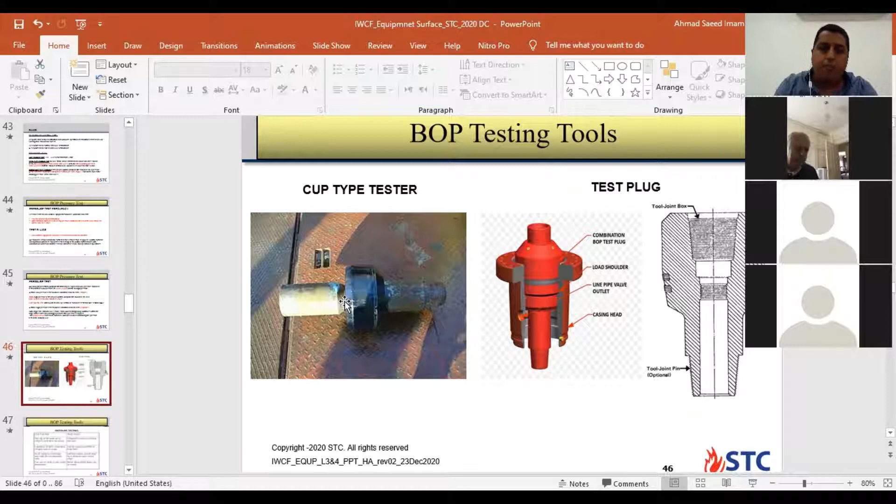There is a BOP manufacturer test, or shell or body test, performed once in the factory after manufacture, and then recertification for the BOP. When can we do recertification or force certification for the BOP stack? Every how many years?

Every how many years do we need to recertify? Every 5 years. Every 5 years, this is the maximum, to make full redressing or full check for the BOP. You need to replace it with another certified one, and send this one to the workshop at the OEM or manufacturer for checking.

Yes, Mr. Saleh: 5 years from the first test or from the first time we start using it? From the time of certification. Okay, it's not from the first test, it's from the certification from the manufacturer.

For any BOP less than 10K, when we pressure test that one in the workshop the first time, it will use or pressure test up to 200%, or twice its rated working pressure. For example, if the certificate is 5K for your BOP stack, that means we take a safety factor, because we pressure test it to 10,000 PSI, two times.

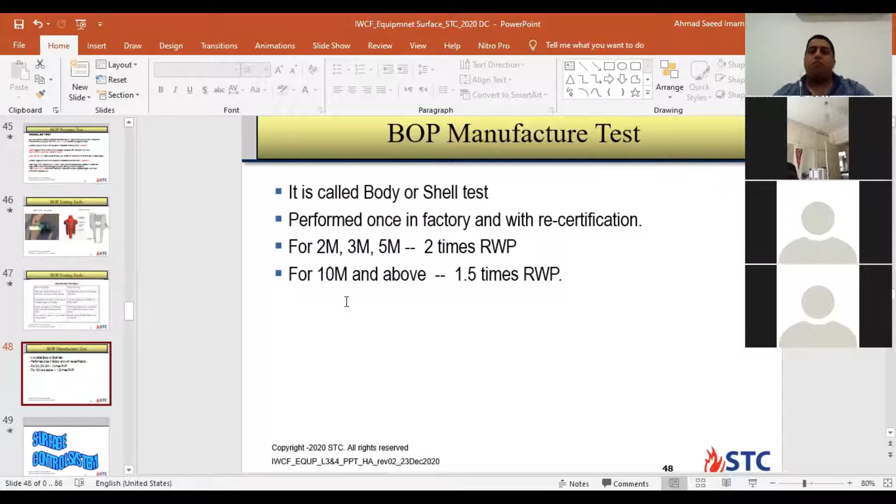Okay, now we're going to start talking about the surface control system for the BOP. Here mainly we'll talk about the surface BOP stack surface control system, which is simple compared with the subsurface system or subsea system.

The main component for the direct surface well control system is a reservoir tank, containing storage for hydraulic oil. What is the minimum requirement for the tank volume for the reservoir tank according to API? How many gallons do we need to fill this tank, or reservoir tank?

So the volume that makes you close, open, and close again for each run? No. The requirement is twice the usable fluid to close all the BOP functions. You are talking about the reservoir capacity, right? Yeah, reservoir capacity, it is twice the volume. If total volume, for example, is 150 to close, you will fill this one with 300 gallons. Okay, this is the requirement for safety.

And you have a pumping system. The pumping system has two independent sources: electrical, the main one, pump, and pneumatic or air supply pump. The same will be at surface, also at the subsea application.

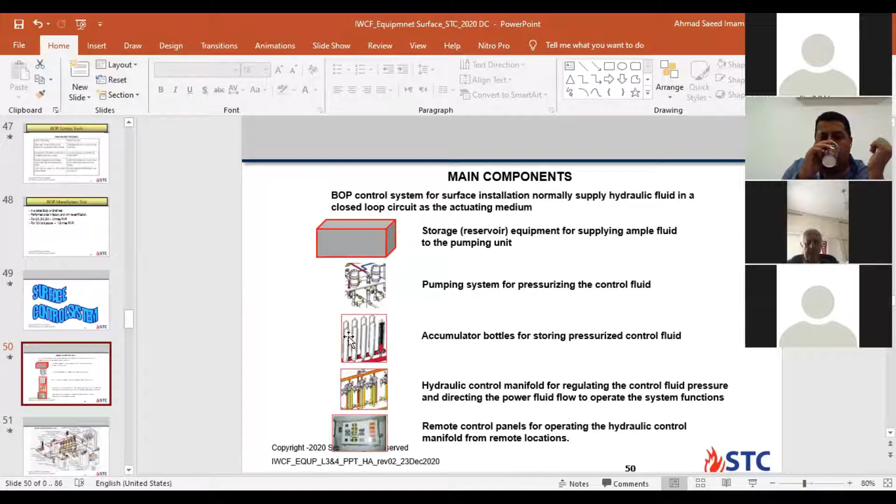I think in subsea it's electrical, not air operated, right? Yeah, it is an electrical system.

Here, this is the basic surface system. This is the bypass valve to operate, so it bypasses the manifold regulator and gives 3000 PSI on the manifold pressure. This is the regulator for the annular. This is the electrical pump, this is the pneumatic pump, the air pump, and these are the bottles. It is simple compared to subsea.

For charging, yeah Mr. Saleh? No, nothing, I forgot to lower my hand. Okay, no problem.

Okay, this pumping system, electrical and pneumatic or air supply, both work together to charge the system. But we have setting sensors for low and high for each pump. According to the API, the hydraulic electrical pump will start to run if you drop 10% from the pressure for the accumulator bottle.

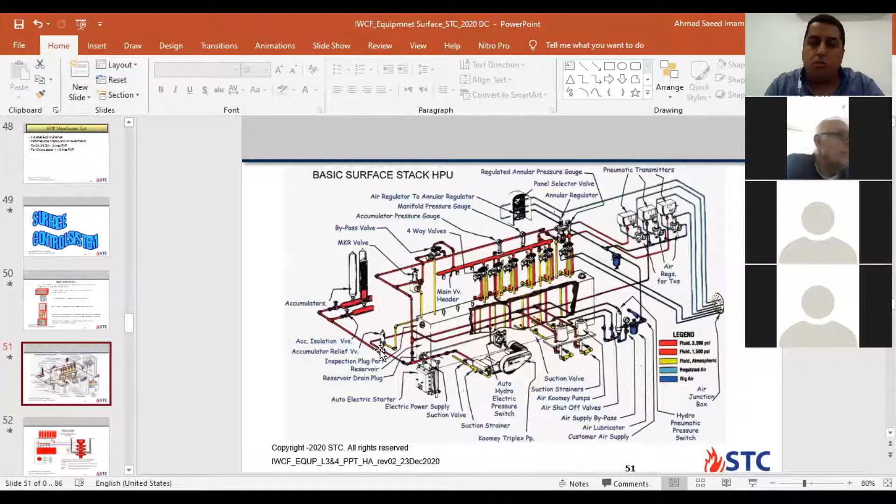Okay, correct, all right.

So why do I put storage hydraulic oil under pressure in the bottle? Why do I need it? The system is working with two pumps. If the hydraulic pressure I took to make one function to the BOP is coming less, the charging pump will start charging the system again to 3,000 psi. This is the concept while operating.

Why do I need to have 3,000 psi under pressure? If we lose power, we may use the trapped pressure inside. First, to make the closing time for the BOP fast, you take the under-pressure volume to close. Second, if you have a power failure, like a fire on the rig, you need to shut down all the power system. In this case, I can depend on the 3,000 psi in the accumulator bottle.

And also, this is something I can do intentionally, which is called the accumulator or drawdown test. I can switch by myself or isolate the pumping system to see the performance of the accumulator bottle, to see which function I can perform. What is the function if you isolate the pumping system and use the pressure from the bottle? What is the function I can do for the BOP stack according to the API?

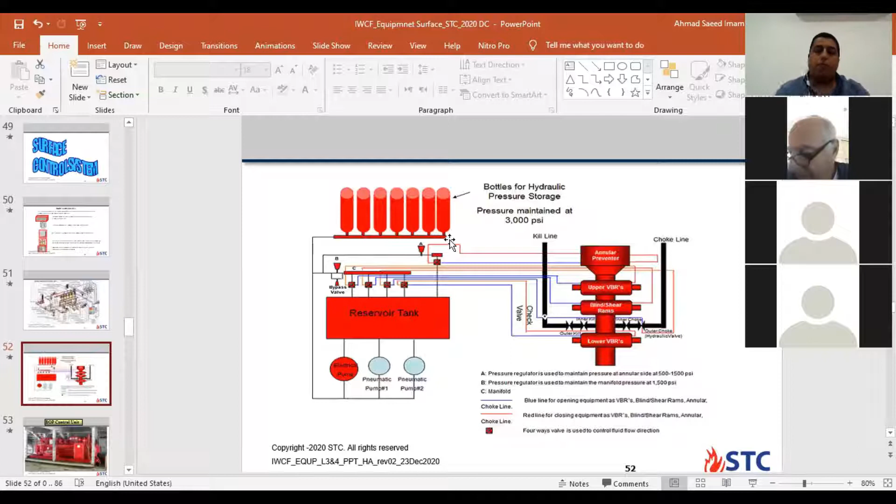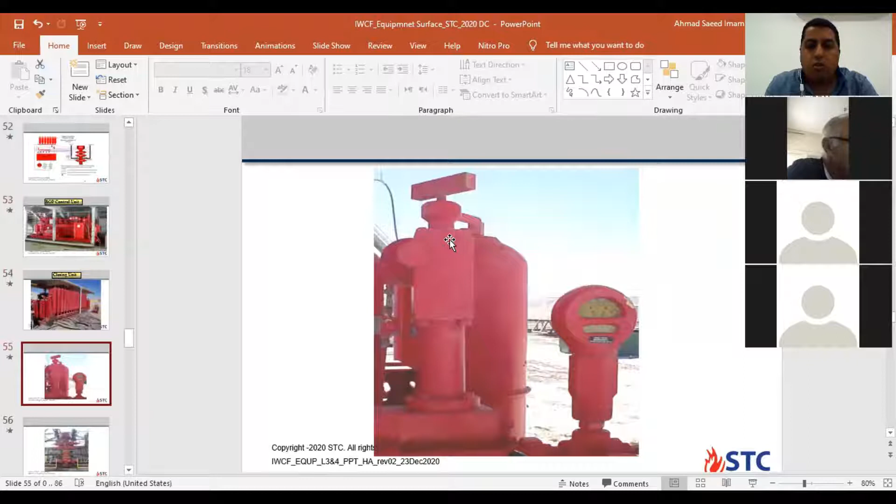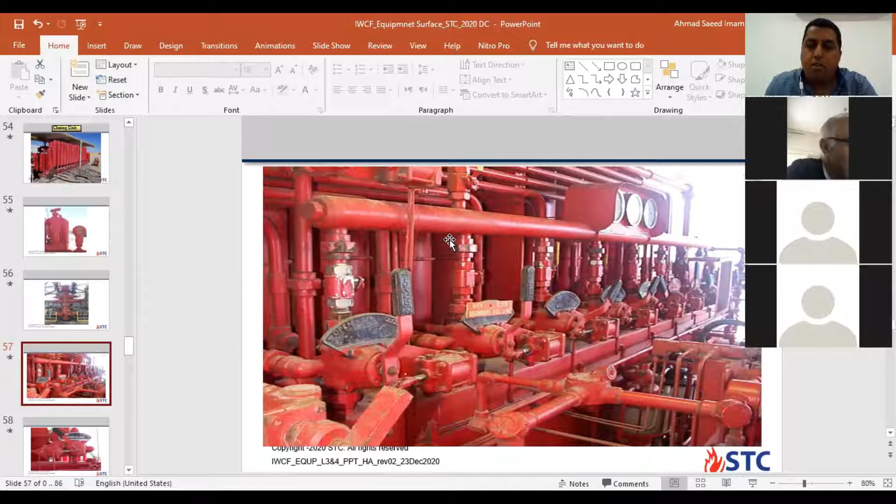This is a BOP control unit for a surface BOP. This is a bottle. This is the annular regulator by hand, manual one. This is the BOP. This is the 3-position 4-way valve. It is operated on surface, differing from subsea. This is open and close, and the position is neutral or block position in the middle. It is recommended according to API not to put this one in the middle. If it is in operation, you need to put it in open or close.

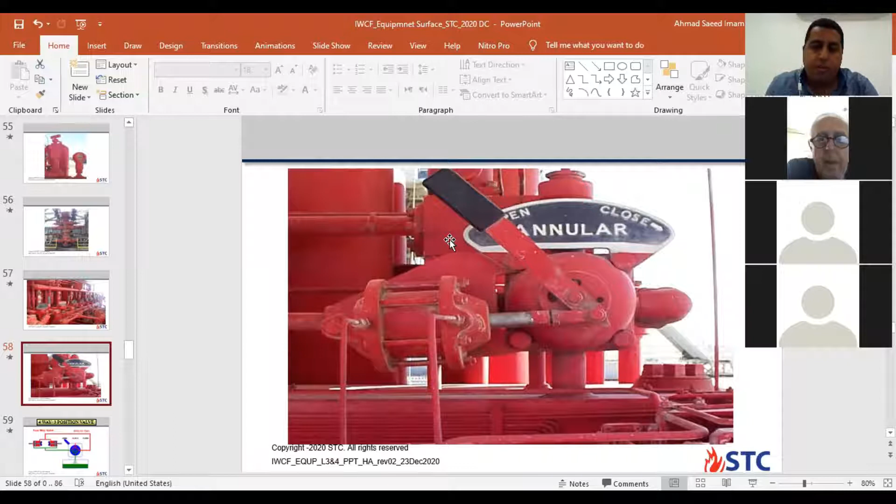This is the 4-way 3-position valve. Actually, for a surface BOP stack, it usually uses the selector type, called a selector type valve. Why is it called 4-way? Because it has 4 connections. One connection to the reservoir tank below, one connection to the gauge at 3,000 psi, another connection to open the ram, and another connection number 4 to close the ram. That's why it is 4-way, 3-position: open, block or neutral, and close position.

When I push to open, that means the pressure at 1,500 starts filling the opening chamber, pushing the ram away from the tubing or pipe. Then the hydraulic oil in the closing chamber will be drained back to the reservoir tank. This is for surface BOP application. But in subsea, it will be a little different because you cannot receive this volume back to the reservoir tank as on the surface.

In block position, if you put it in block position, you will block any leak inside the line, so it will be blind, neutral position. That's why it's not recommended to install in block position while in use. You need to use open or close position.

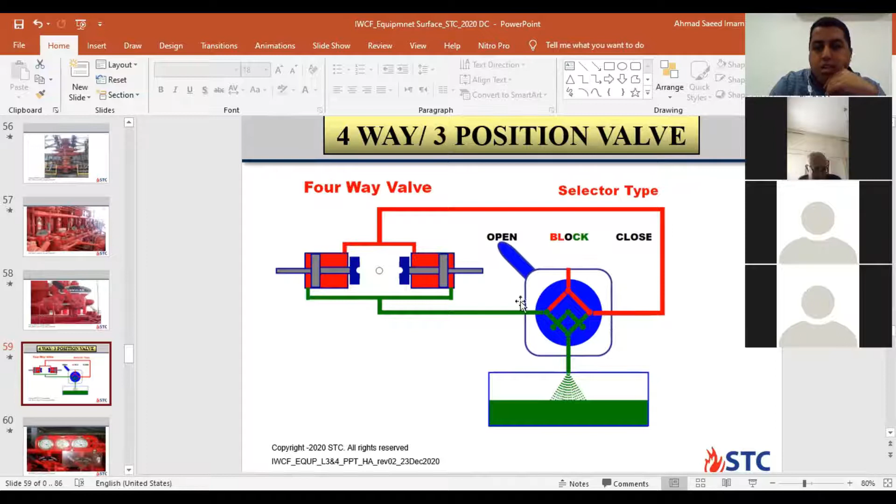And sometimes this selector valve may be leaking fluid, so when you put it in block position, you will stop this leak. You will not see it. Correct. Okay, yes.

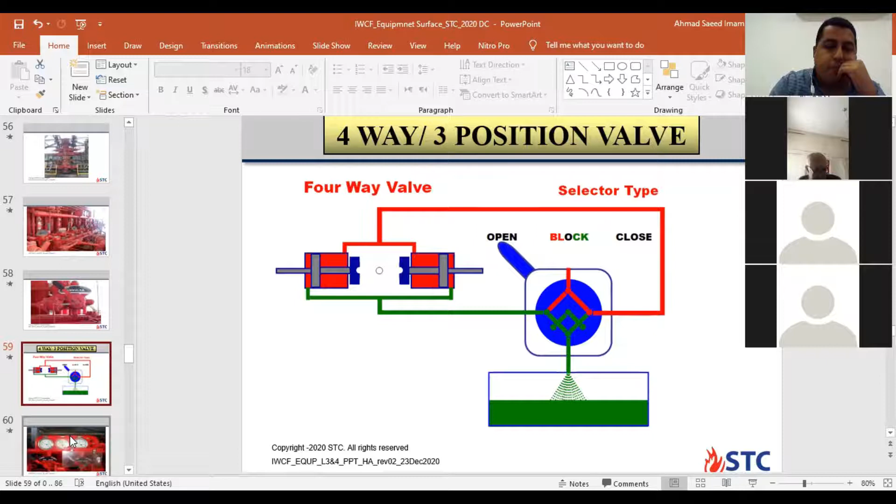Since it is shear on 3,000 psi, there is no problem. But if you operate the shear at 1,500, it can collapse - cut or collapse your pipe. In some condition, it can cut some tubular.

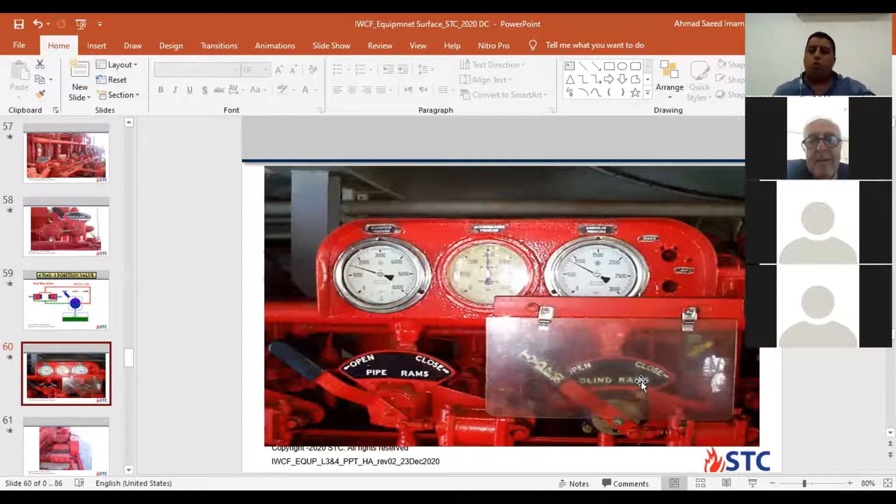Like in Saudi Aramco, they put this cover, and at the end for the cover there is a screw connected to an electrical sensor. When you start to move that one, it sounds and gives you an alarm - take care, you are going to shear. Yeah, this is for safety.

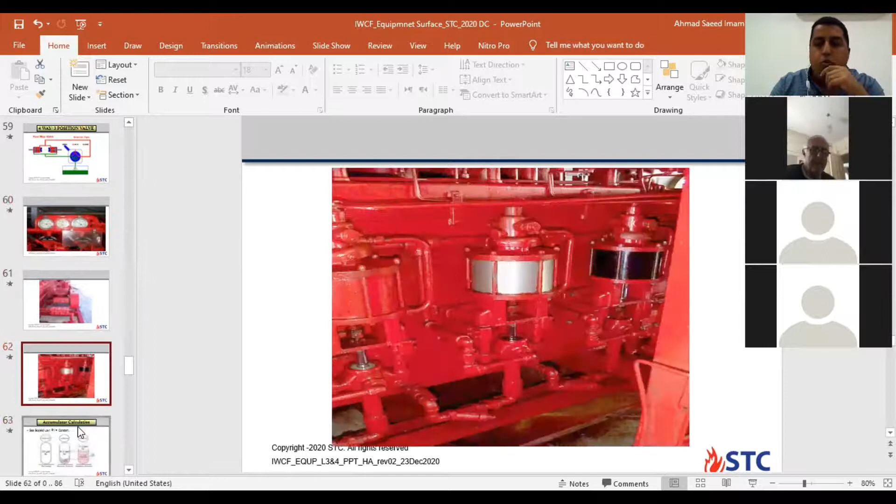Mr. Hani, is this for any operation? This is for surface bottle, not for subsea. Yeah, but for any operation? For any operation, if you have it, you can apply this pressure law, P1V1 equal P2V2, to get the pressure for the gas or volume for the gas, and the rest will be for the oil. Okay.

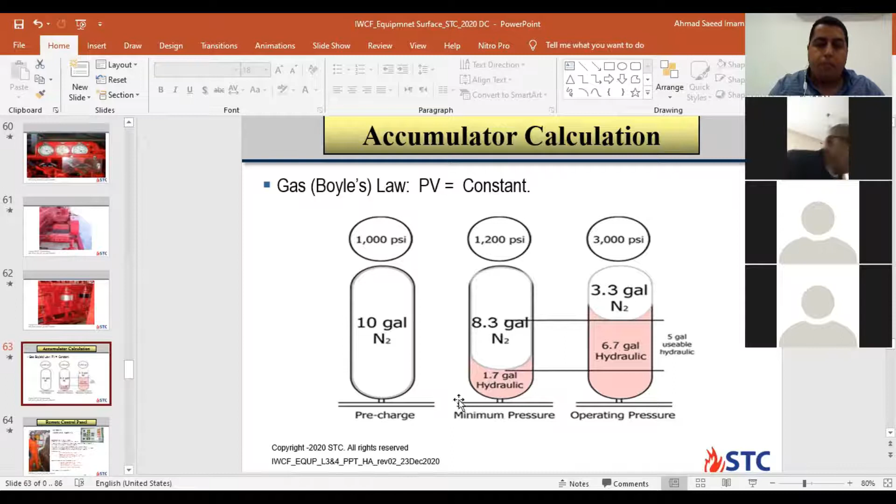What is the optimum pressure for the air pressure in the rig? 100 to 120. Sorry? 100 to 120. No, actually it is 120 to 125.

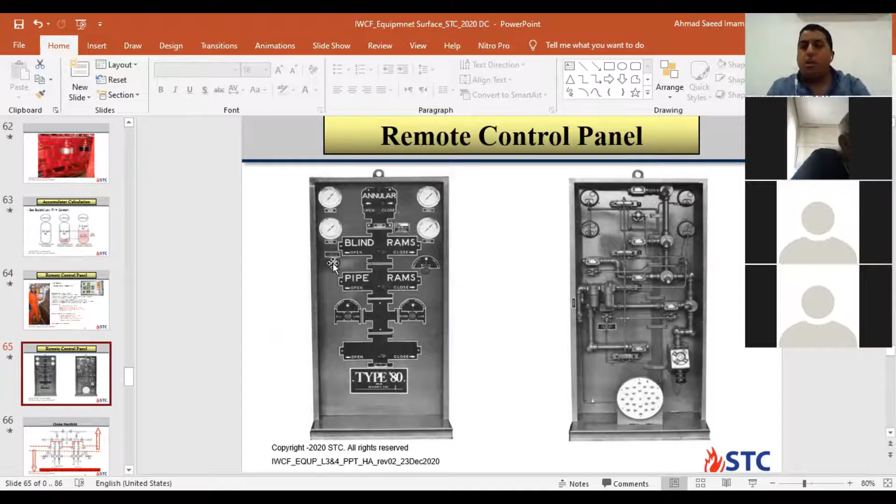Okay, and also Mr. Hani, there is now for the remote control panel, there are touch screens now. Yeah, touch screen. It can be all types like this - this is the master valve, you push it down by hand. This is all types, or this is the electrical one, but still works the same with air.

You need to apply the master valve. When you push the master valve with one hand - that's why it's called two-handed operation - push and hold, then you push to close any ram or BOP stack. What will happen? First you will find the light will change from green to red, from open to close, or from red to green to open the BOP.

The light changing is not an indication the function is done successfully. It just indicates, okay Mr. Saleh - first the light will go off, then after some time the other light will come on. But as you said, it's not confirmation. You need to confirm from the pressure. You will see the manifold, for example for RAM drop, then the accumulator, then charging back to its normal value. Okay, yes, this indicates the function is done.

A changing color here is related to the three-position four-way valve being shifted to another position. Why does the changing color relate to shifting the four-way three-position valve? Because the sensor for the light is attached to the pack or the side for the four-way three-position valve. So when the four-way valve changes position, the color will change. After that, you still give order to pressure to go in the closed line to push the ram to close.

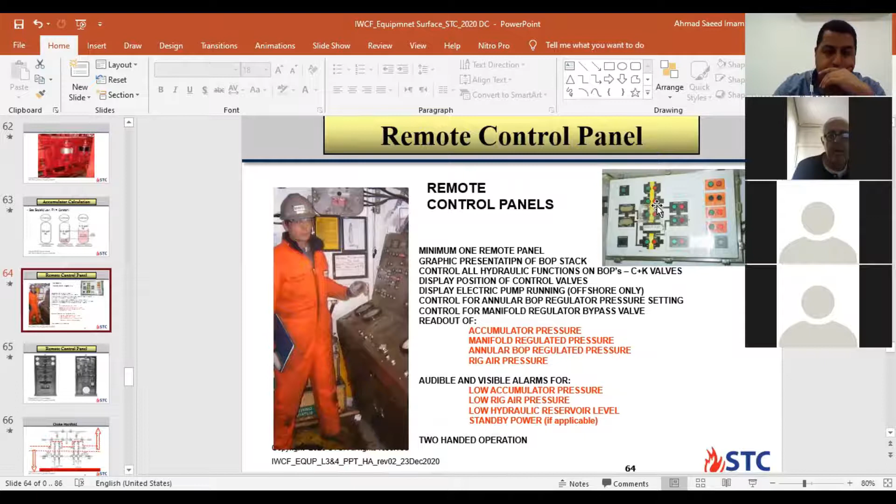After that, we'll move to talk about the choke manifold. The choke manifold is an arrangement of valves to control the fluid or flow coming from the choke line, from the BOP, or from the well. You mainly have in the choke manifold 1 or 2 manual chokes, used for the volumetric method only, and you have 1 or 2 remote operated chokes. For 10K, the minimum requirement according to API is to have 1, but in some rigs you have 1 plus 1 as backup. The function of the remote choke is to create back pressure on the well to control the bottom hole pressure during circulating out the influx.

Are you going to pressure test the remote choke? There is no pressure test on the choke - there shouldn't be, because the choke is not a seal element. There is a pressure test on the choke. There is - on the remote choke you will pressure test. No, for the manual choke there is pressure test, for the remote, no. Let's make it correct: if you have a remote choke, it should hold pressure - it is better, though I don't know how to say it exactly. The remote choke should hold the pressure, and it may hold the pressure, but in general, since the choke is not a seal element, it shouldn't be tested for pressure.

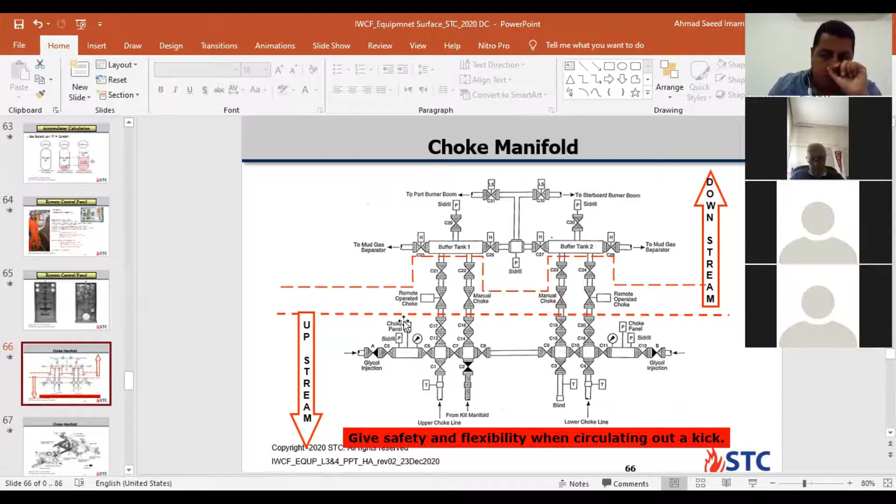This is the manual adjustable choke. And this is the two hydraulic remote choke.

The hydraulic choke works from the remote choke panel with hydraulic fluid. There are two mechanisms for operating the remote choke. One is the Cameron type, working with a seat and...

...a rod or stem. When you close the position more, it closes this area, which means the upstream pressure increases. This rod or stem is made from tungsten carbide. So this is the mechanism for the Cameron one.

For the Super Swaco one, which is the common type, we use two blades made from tungsten carbide. One blade, the lower one, is fixed, and the upper one is rotated by pressure, and they cut it in a half-moon shape, opening the area in half.

That's how you control the position of the valve. When you rotate it, there is a percentage for the opening of the choke. When both opening half-moons come together, that means 100% open. On the other side, it will be completely closed. This is the mechanism for the Super...

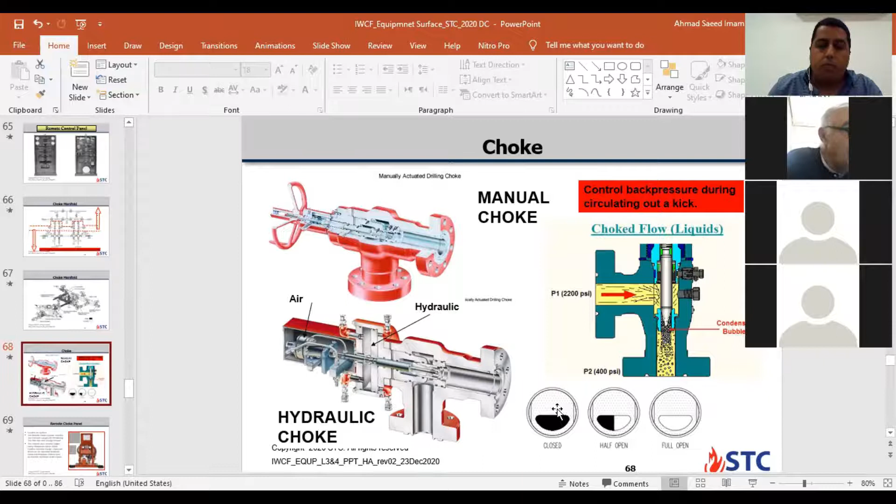The remote choke panel, located on the rig floor, can be single or tandem. It contains gauges for drill pipe and casing, stroke per minute, total stroke, a lever to control the choke position, a gauge for the choke position, and also the air supply.

These are control hoses containing hydraulic pressure to operate the remote choke. If you lose the hydraulic connection hose or the hydraulic pressure drops, you can operate with the hand pump here. This is a backup for emergency.

There is a storage tank here for oil. You can operate manually by hand to open and close, or to close the well to control the flow.

There is a regulator here also operated by air. This is for the speed regulation, you can make it fast or slow.

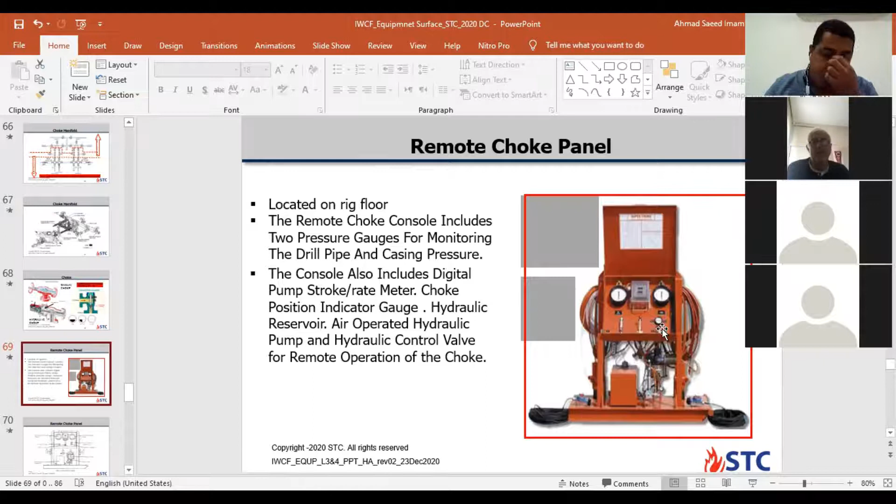We'll see this one today, inshallah, in the simulator. This is the panel, the remote panel, single one.

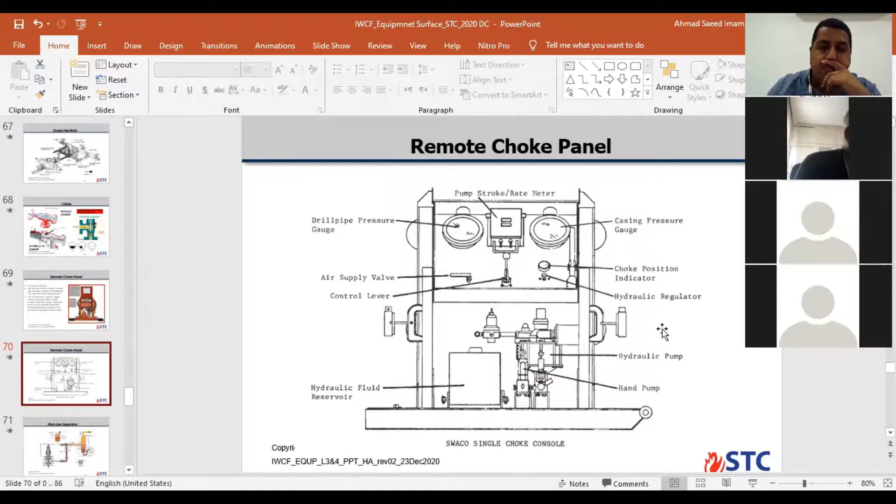After that, we'll talk about the mud gas separator, or MGS, also called the poor boy degasser system. This is usually used to separate large volumes and large bubbles of free gas during killing or drilling operations. The return here is coming from the BOP through the choke line.

It is controlled by the remote choke. Downstream of the remote choke will be the choke manifold, then down to the mud gas separator. The mud gas separator contains plates here, so the gas will break and go up through the vent line, and the mud will come down to the dip tube area, back to the shale shaker.

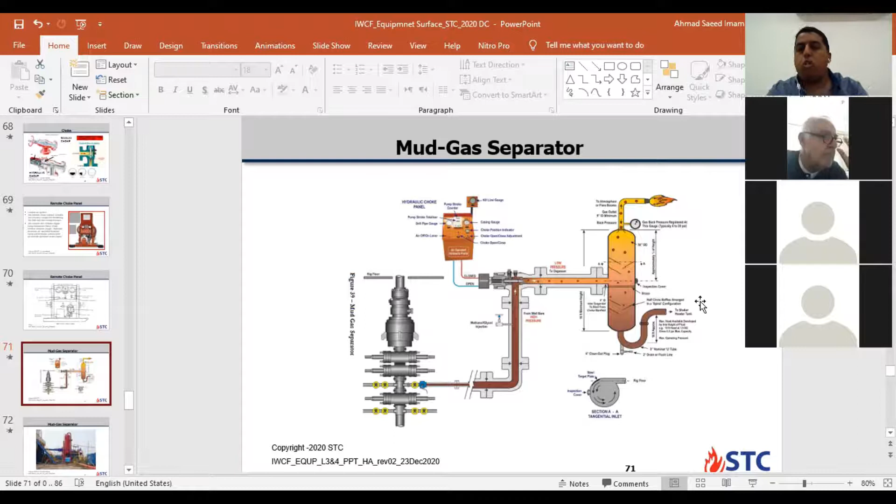This is the surface view on a land rig, and here is the cross section of the mud gas separator. If you look here, here is the inlet for the flow coming from the well. The gas will come up from the vent line.

The vent line affects the back pressure in the mud gas separator. It should be short to avoid creating back pressure, and it should have enough diameter on the inside. After that, the mud comes down here from the U-tube or dip height, coming to the shale shaker area.

While killing operations, you have a gauge here at the top of the mud gas separator. This gauge usually ranges from 0 to 50 psi or 20 psi, and it reads the back pressure or the pressure inside the mud gas separator during circulation or killing operation.

The mud gas separator is normally filled with the same fluid used as the drilling fluid. For example, this height lets you measure the hydrostatic head of the dip height here for the U-tube, using 0.052 times this height times the mud weight inside this area. It gives you a certain pressure, for example, 20 psi.

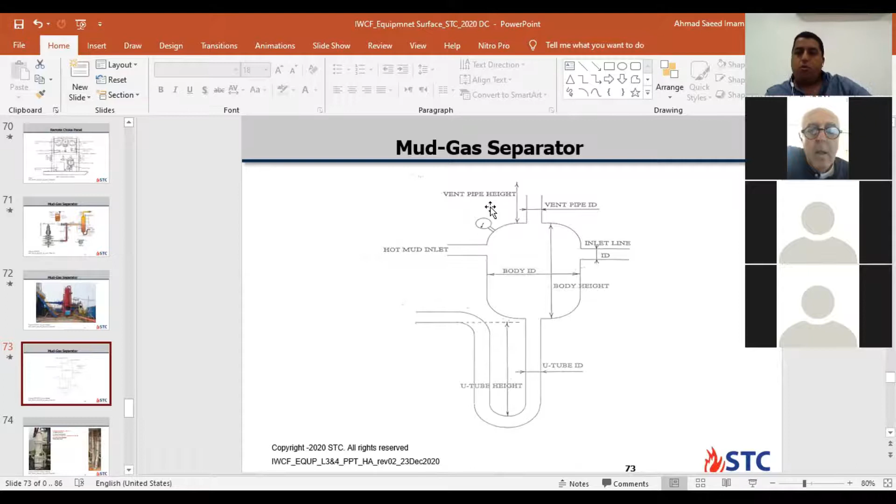Again, the pressure build up or back pressure inside the mud gas separator is related to two functions: vent line ID and vent line height. Maximum operating or capacity is related to the U or dip tube height, sometimes called mud seal level.

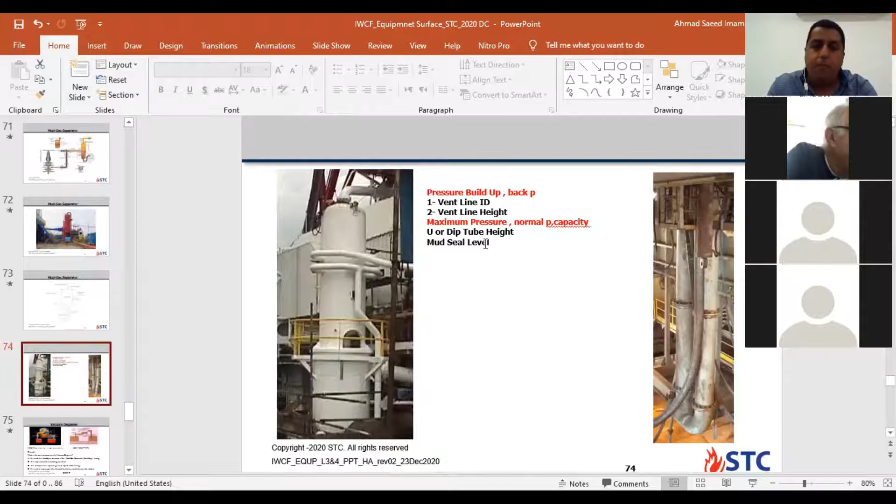After that, we have a quick view of the vacuum degasser. Is the vacuum degasser a backup for the mud gas separator during killing operation? No, no, different. Why? Capacity. Vacuum degasser capacity is much less than the mud gas separator. And also, the vacuum degasser is designed to remove solution gas in the mud.

This is the main concern here. The vacuum degasser is designed to separate small dissolved gas bubbles from the mud during well control or during drilling if you have gas cut mud. So it cannot handle a large volume of bubbles. Second limitation, it is mounted above the mud tanks, so it is not advisable to flare or separate a lot of gas in this area. These are the two limitations. That's why the vacuum degasser is not a backup for the mud gas separator. If you have a problem with the mud gas separator, you need to stop circulation until you fix it.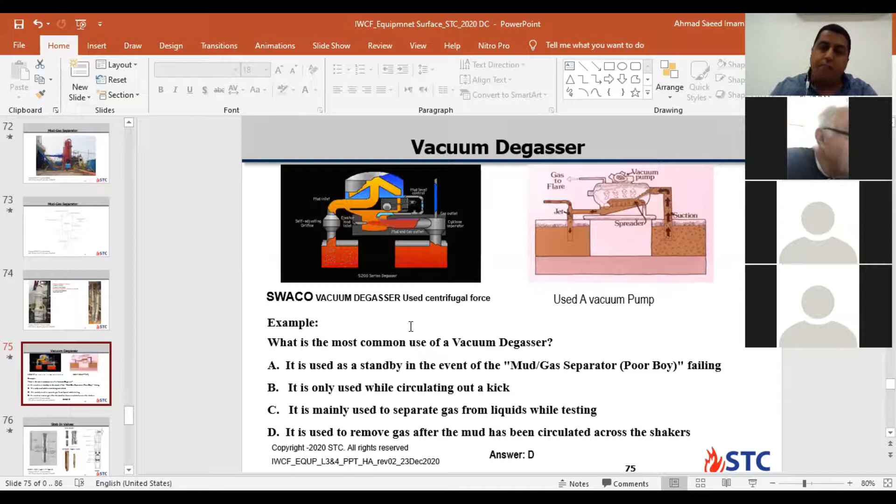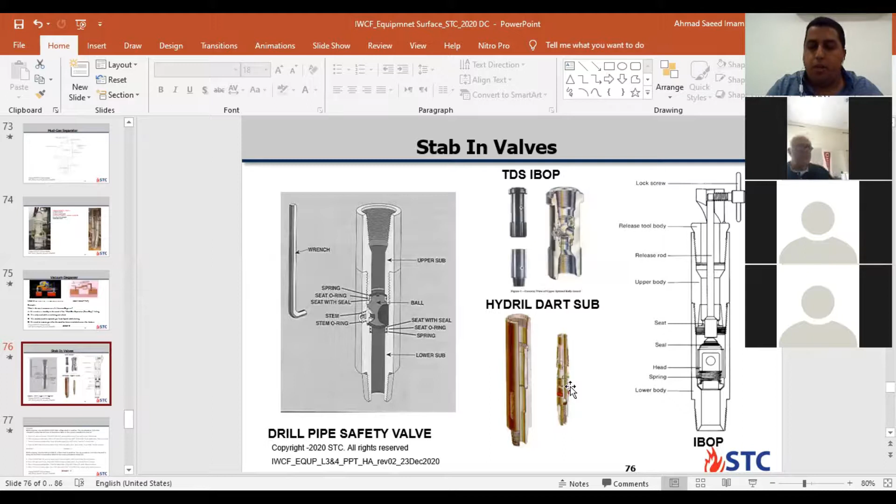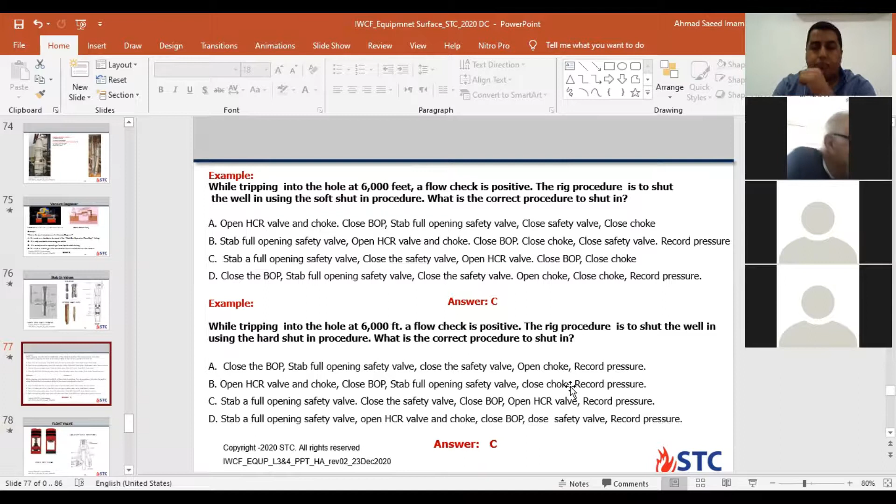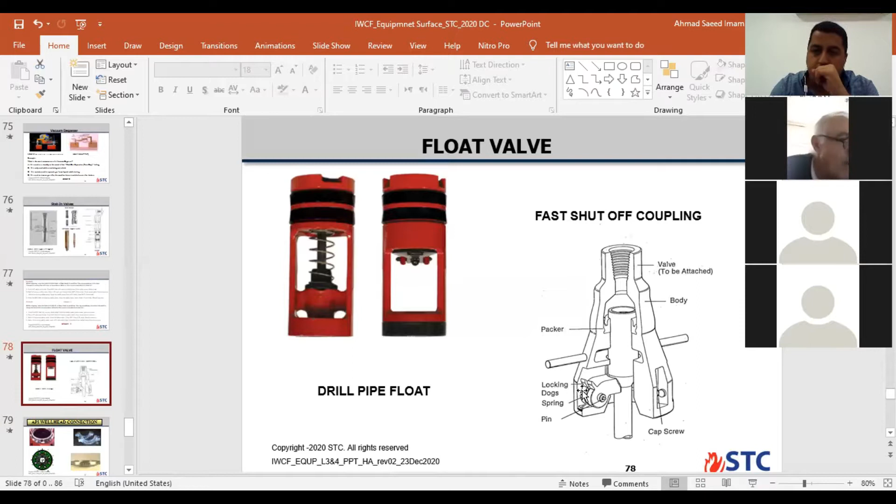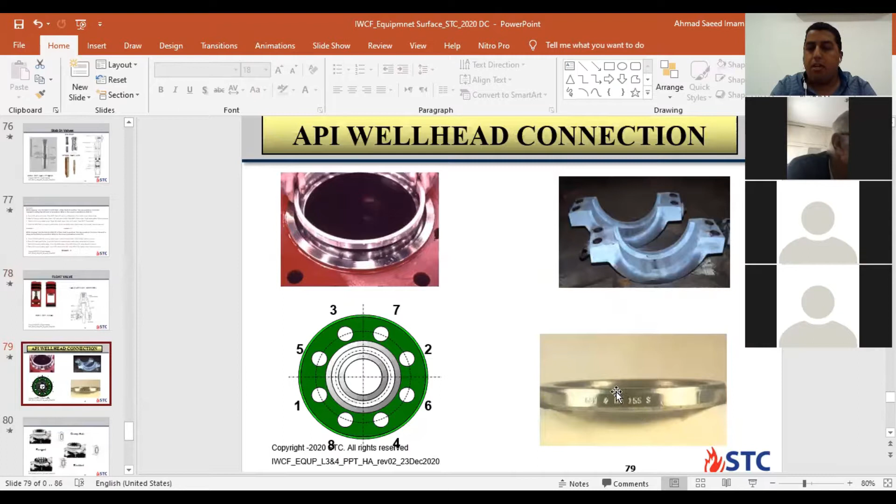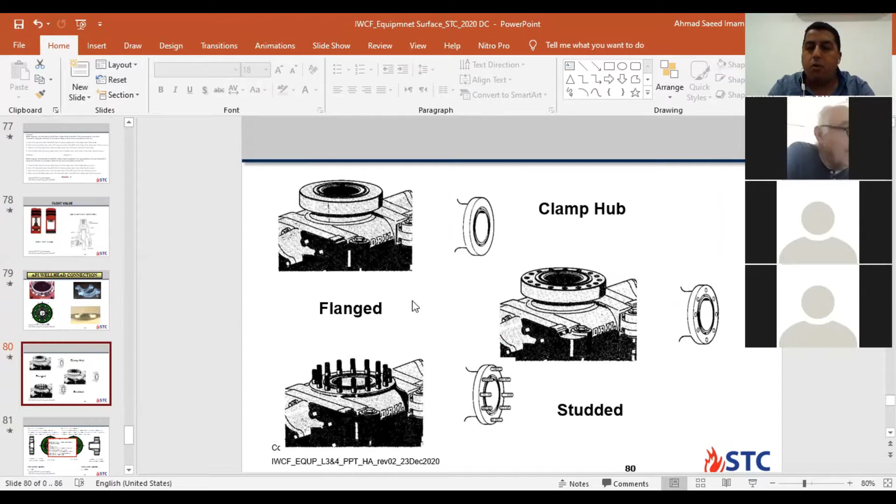Okay, clear. Last point in the equipment part is about the API wellhead or BOP connection. This is the flange, this is the ring gasket, it's written BX type, and these are the 3 common connections for the wellhead or the BOP.

This is for BOP. It can be a clamp hub, a normal flanged connection, or a studded flange. According to API, you have 2 types for the flange: one is called 6B, the other type is 6BX flange.

With 6B, we use 2 types for the ring gasket, R and RX. For the rated working pressure, for low pressure from 2000 up to 5K, we use this type for flange with this ring gasket. The other type is for above 5K up to 20K, so this one is best for well control or the BOP.

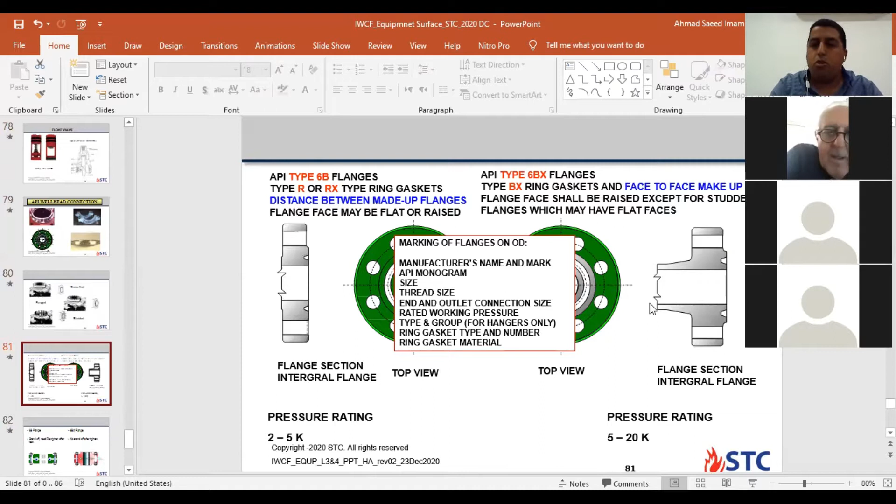With 6B flange, after you make torque for the bolts and nuts, there is a gap here between the faces of the 2 flanges, this is called standoff. But in 6BX type flange, there is no standoff, because the ring gasket sits inside its groove.

So which one is best for well control? The right one, BX. BX is the best one, because if you have vibration or looseness, it will not leak compared to the 6B flange.

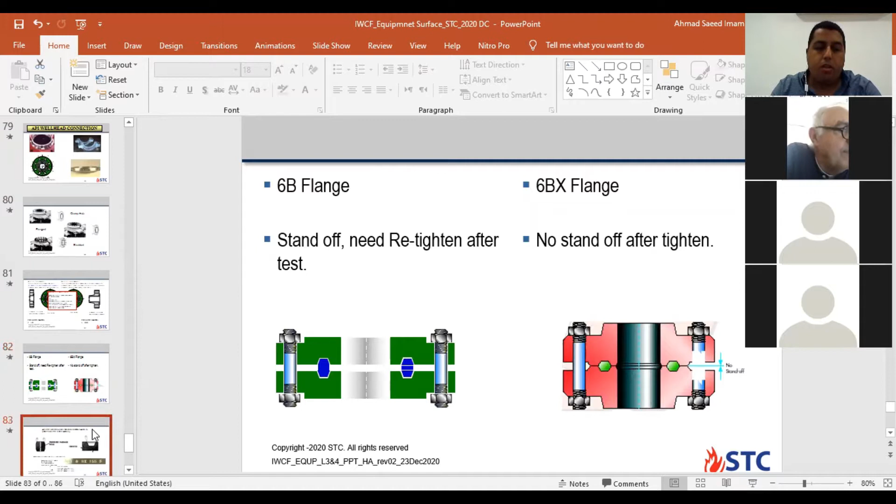Any ring gasket ending with X type is called a pressure energized ring gasket, like RX or BX. Why? Because there is a port for this ring gasket. When you make a pressure test by hand pump, this port will take pressure and make more sealing around or inside its place. The ring gasket is a metal to metal seal without any packing element.

This BX, the S refers to steel or the material for the ring gasket, like low carbon steel or soft iron, whatever the type. This number, 155, is related to the size of the ring gasket.

The ring gasket is one-time use, you cannot reuse it even if you connect and disconnect the flange only one time. Why? Because there is a little deformation that happens to the ring gasket after tightening the flange, since the ring gasket material is softer than the groove material itself to take the deformation. That's why it is only one time use, even if it is visually in good condition.

Because that changes the tolerance of the gasket, right? Yes, yes.

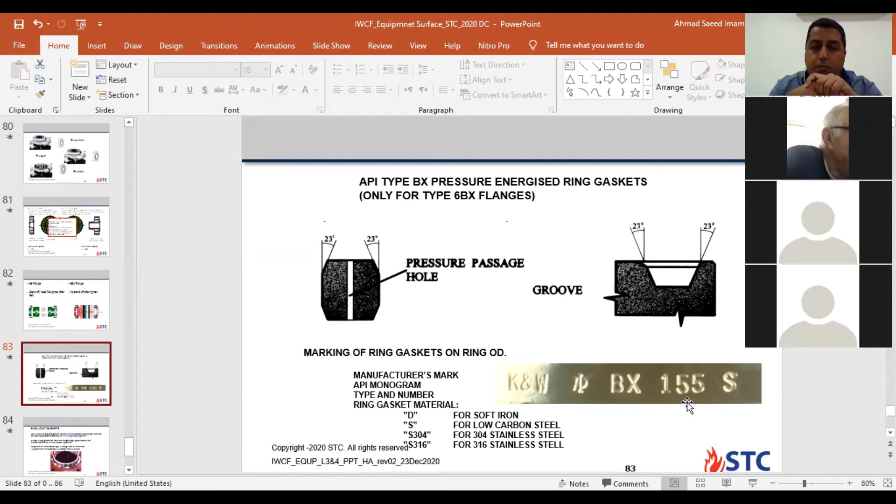How to clean the groove for the ring gasket? According to the API, don't put any grease, just dry and clean it with a rag or a piece of cloth, that's it. You don't need to put any grease, because the grease will become a pressure pocket container. So according to the API, it's not recommended to put grease. This is how to install or clean the groove for the ring gasket.

For sure, this type is for surface BOP stack or surface wellhead. The connection for subsea will be a hydraulic connector with another type of ring gasket.